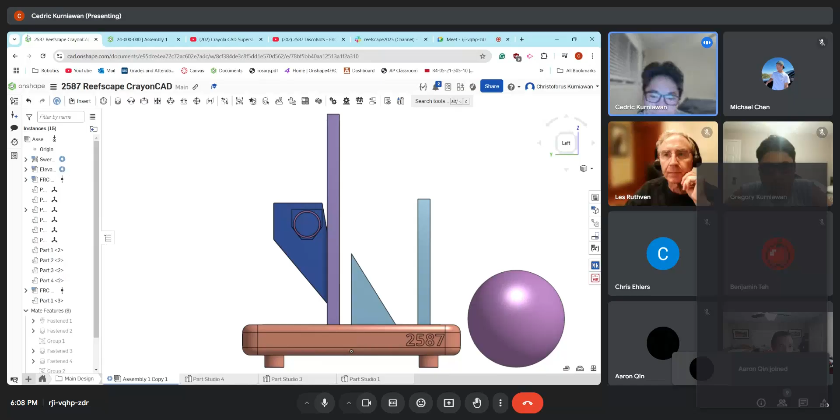So we already discussed this during kickoff, but obviously this year our main goal is to go simple. Our main goal this year is to make our robot as simple as possible. And we already discussed that we probably knew in order to get from L2 to an L3, we were probably going to need an elevator.

So this is that. And for the sake of simplicity, I thought doing a 2-stage elevator would be too much. So right now, it's just a standard 1-stage elevator with this mechanism on it. And so the whole idea with this robot is that we can...

Hold on one second, I'm looking at the screen. Do you guys have the CAD as your main screen? I can change myself. Yeah. Okay. Are you not seeing CAD? Okay, now I got it. Okay, sorry, I'll take a pause there.

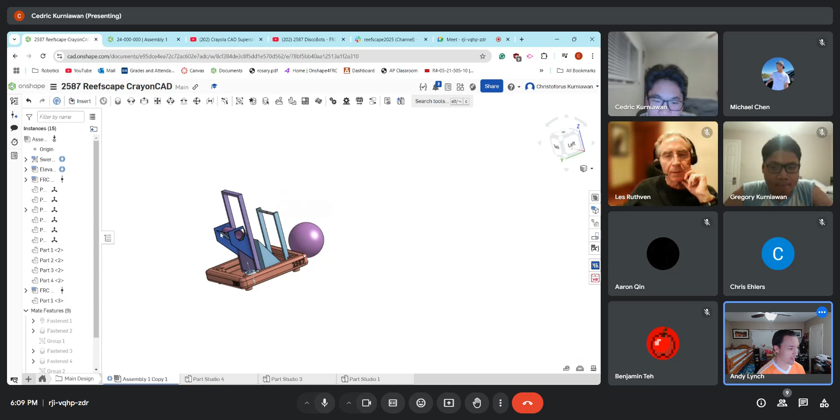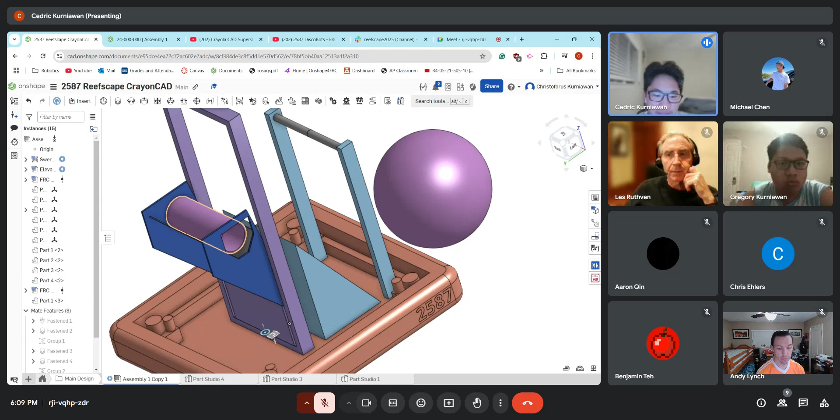Got it. So the whole idea here is we can intake it very easily through the human load station here, and without manipulating the coral in any way, we can outtake it and it's already in the correct orientation to score on the reef. So the elevator would be down and someone would roll the coral into here, and we would have some sort of flywheel mechanism, or we were also thinking vector mecanum wheels, to drive the coral out of this and onto the reef.

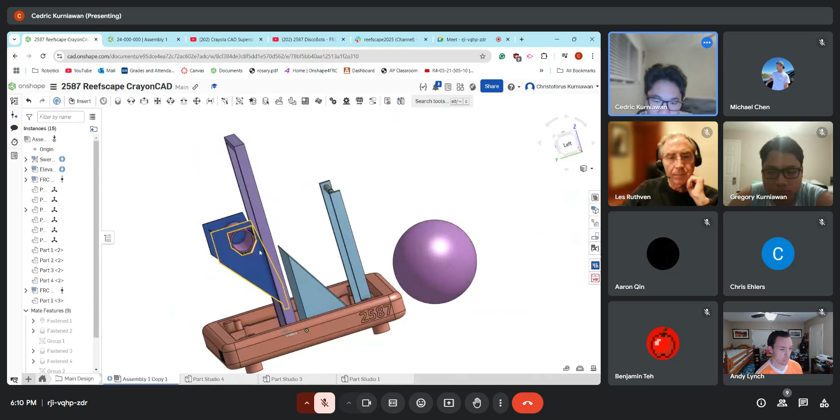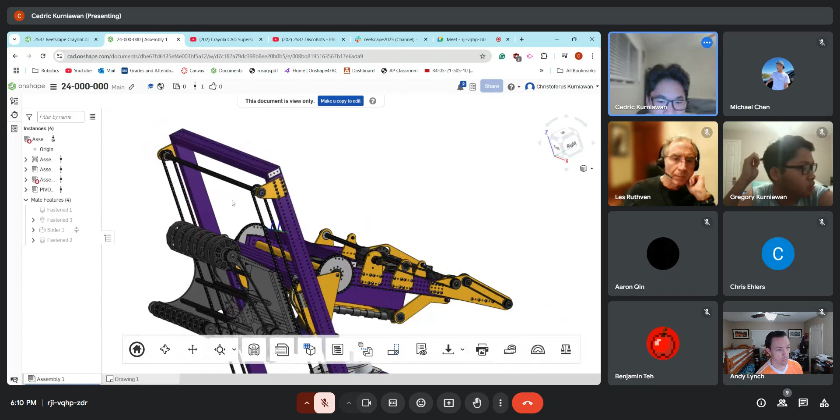You'll notice here, actually here, I'll talk about this section first. So this whole idea came from one of the Casino Clash CADathon entries, the one that won most innovative. I thought their elevator was extremely simple, and I feel like it's something we can do. So yes, this is a lot of stuff, I know, but their whole elevator is just this.

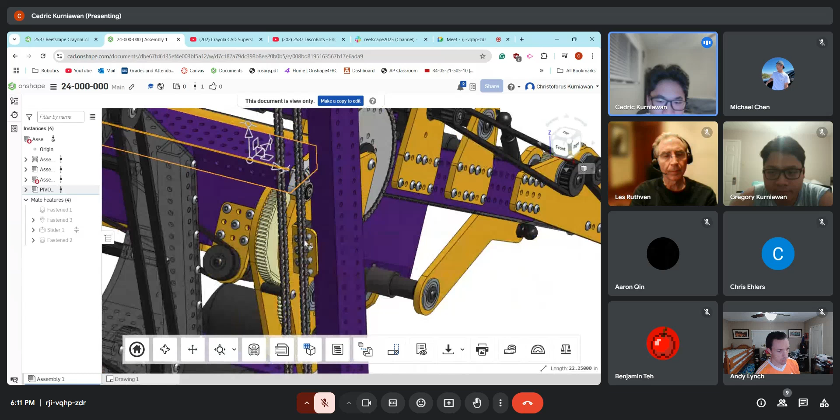If you look down here, it's just 2 motors connected to gears. You have sprockets on both sides, and then basically the same setup up at the top with the main carriage here, and you have these little brackets to mount the carriage to the chain. I know we said we wanted to stay away from elevators as much as we can, but as far as elevators go, this is probably one of the simplest versions we could do out there. So that's why we did that.

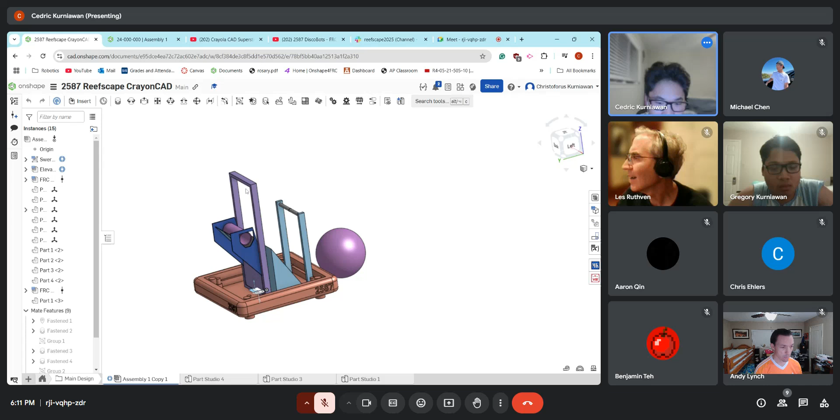We decided to say a very hard no to anything more than one stage, because when that happens, you start to mess around with tension, and that's just not something we want to do. So we thought this would be enough. Yes, there's a lot of interference right now, but we'll clean up the geometry in a sec.

When we finalize our approach, now for the algae mechanism, you may recognize this. This is from the 2014 robot for DiscoBots, Octanus. This is what we plan to do.

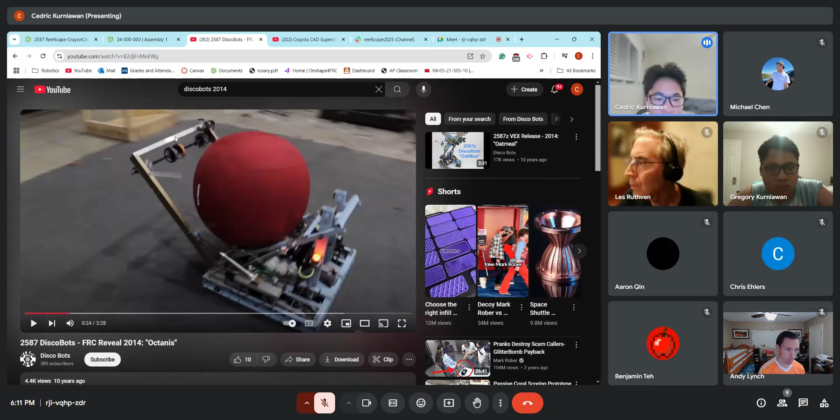A lot of our plans had a 4-bar involved, but we thought this was the simplest way to do this. How this would work is essentially this would pivot down and intake the algae ball, and then you'd get the ball into a position something like this. And when you get to the processor, you can just outtake it, and the ball should go straight into the processor. So we thought that was probably the easiest way to do that.

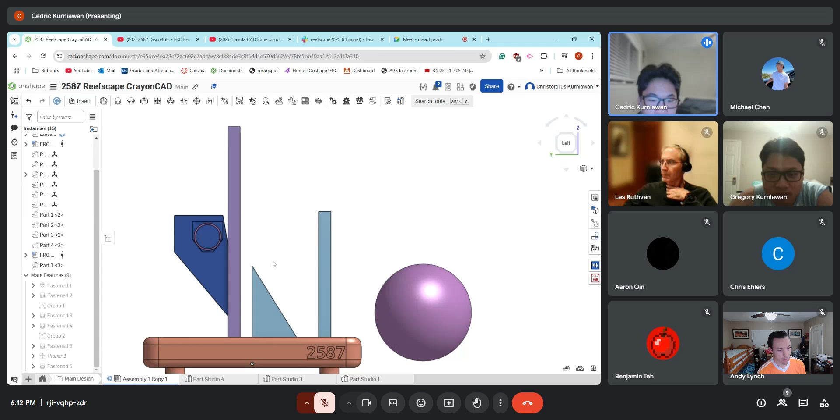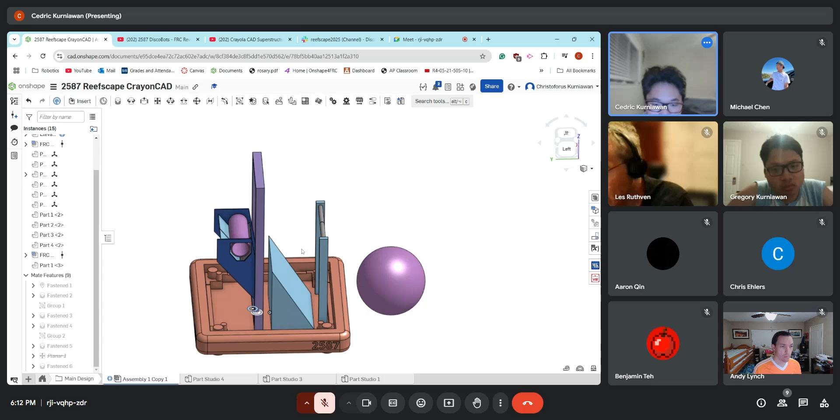In terms of climb, I know we discussed that it's not a priority, and it isn't. The only way I see us doing climb is if some other teams are prioritizing climb, so if any of them have a good system we can implement without making huge design sacrifices, that's feasible. Or when every bot gets released, they usually have a climber as well, so that's always an option.

One thing I would like to point out is that a lot of our ideas did align with a lot of the ideas that were from other teams. I saw Penn State had a very similar approach, doing L1, 2, and 3, and doing algae.

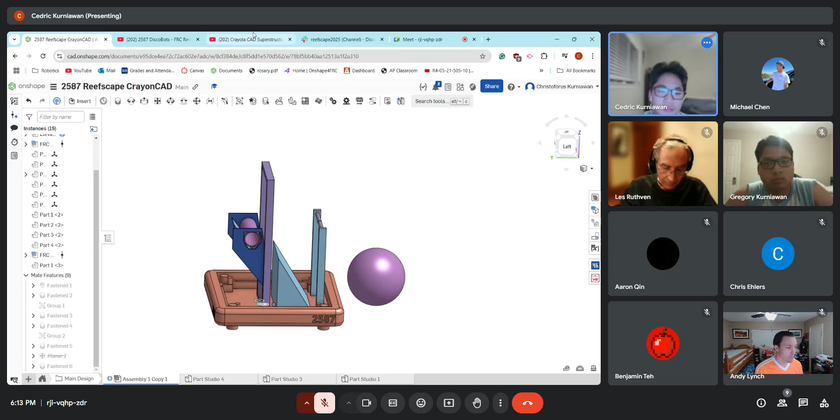This is Cranberry Alarm. They actually have quite the complex robot for their level. They have a 2-stage elevator, and you can see here we kind of have that same idea. Of course we're going to iterate upon our idea more, but this should be a good general idea of what we're trying to do, elevator-wise.

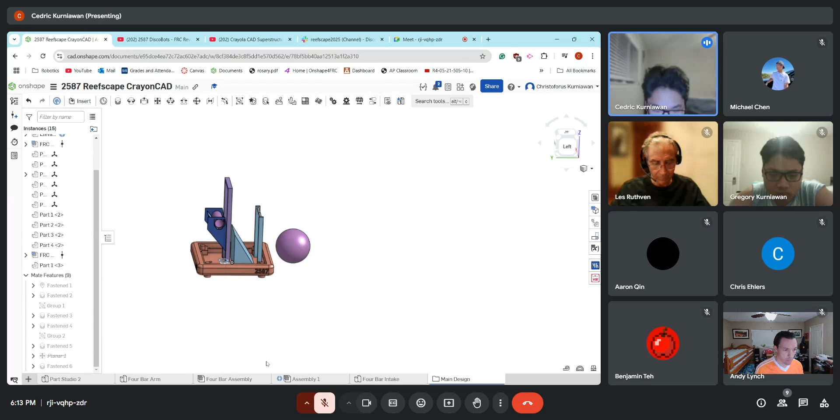Yeah, that's sort of what I've been working on. There was another one of our ideas. Before I got to this, I was thinking, how could we do this without an elevator? And that's when I stumbled upon trying to do a 4-bar, which looks something like this.

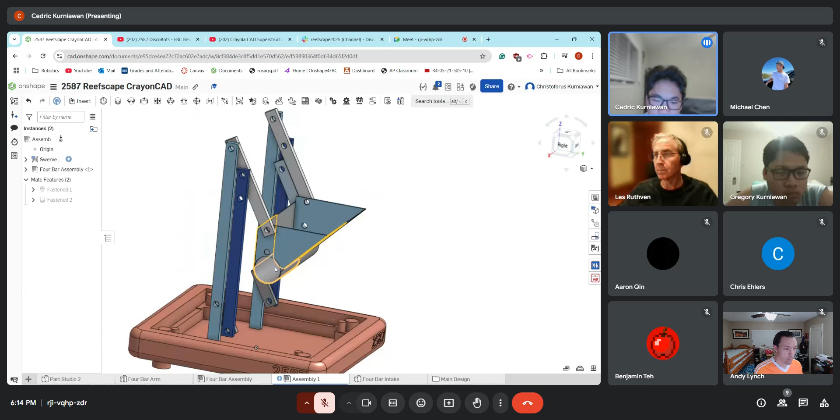This was the old version of the funnel, we can call it. It works in the same way, in essence, by the human load getting dropped into here, and then the coral getting seated here, and then you can outtake it through this hole onto the reef. After some looking at this, by the way, this inspiration was from Spectrum 2025. I saw one of their videos was a prototype 4-bar, which is where this whole idea came from.

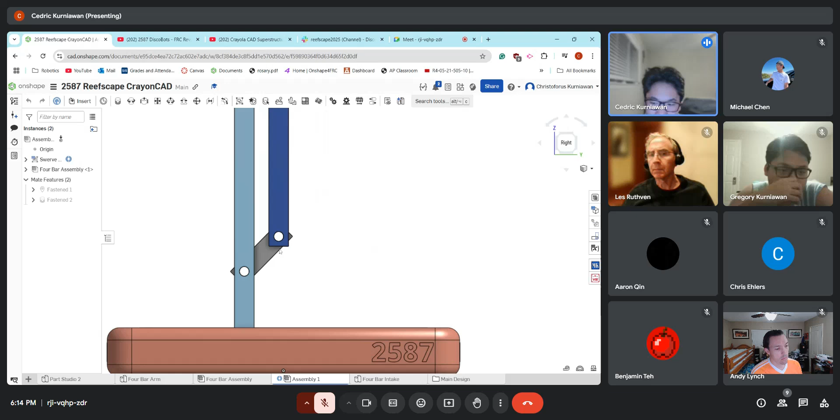Basically what they had was they used I think 2 motors, but only one thing was actually being driven, which is this piece of tube stock right here. And you can see via all the connections, you can get high and you can get pretty low as well.

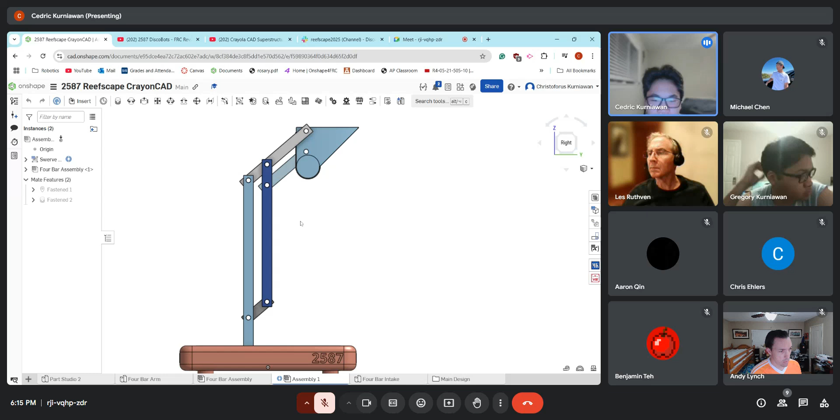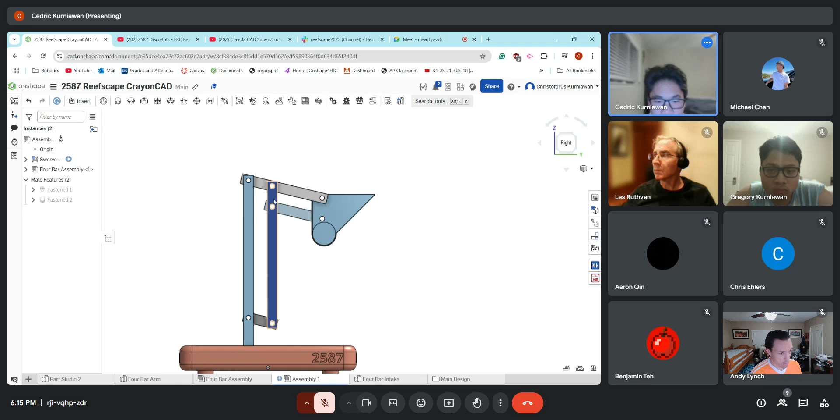So I thought this because before I figured out how to get the right elevator stuff, I was struggling to get the right reach to get to L3 using the elevator, so I thought this could have been the alternative. But once I looked at it again, I saw this is a lot of metal and it's really heavy. You could do a chain bar, which has the same functionality but works slightly differently. But I decided that this may not be the best option, and it may just be better to do an elevator sort of like this.

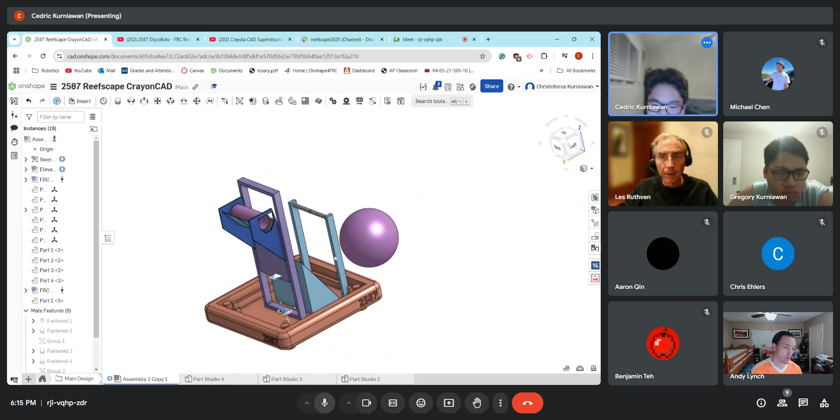Yeah, that's what I've been working on this past day, basically. I think it's a good start. I'm not so worried about the lifting mechanism.

I think if you've done the math, the top purple is max height. Top here from here to bottom is 41.75, which is extremely close. Again, that's definitely something I'm going to have to refine. But yeah, you'll see this is parallel distances, 41.75. The max height is 42, so we have a quarter-inch tolerance.

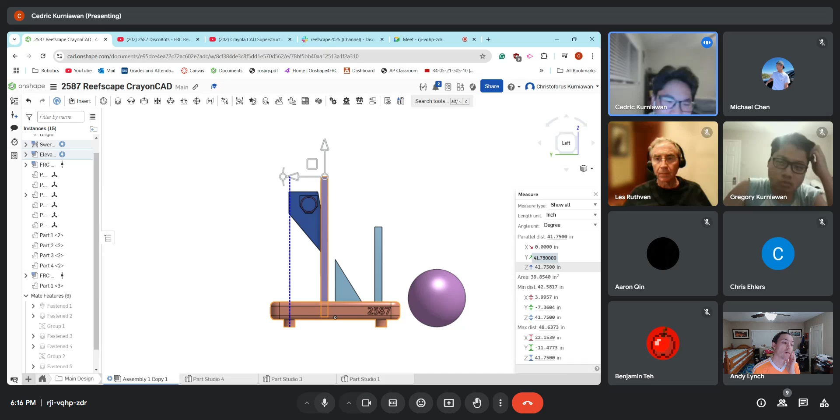But I promise this will get fixed. It's going to be a shorter elevator, and we're going to change the geometry of this blue plate here to make this work the same way, but be a little bit shorter.

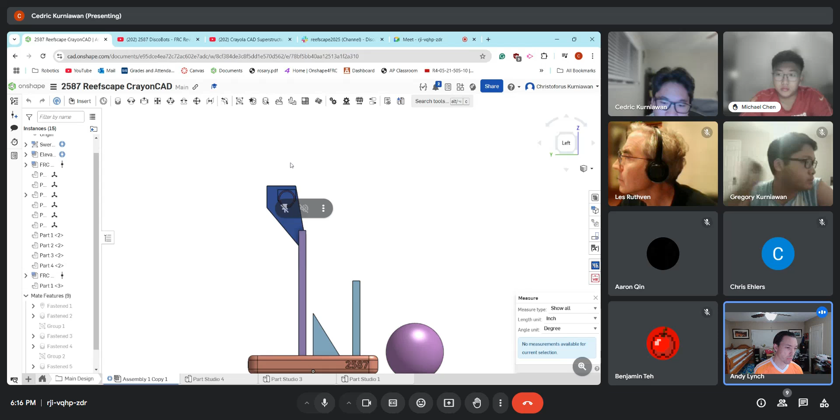And this goes to L3. Yeah, this is able to go to L3. What's the tolerance, like does it go above L3? Slightly above. I realized that for each of the reefs, the dimensions they give you, you could do like 1.5 to 2 inches above or below, and it should still get onto the reef. But right here, we are at absolute max reach. This number is 48.3, so we're right there.

Yeah, the tolerances aren't great right now, but that's because this is rushed. I think we could make it better if I spent more time trying to refine all of this.

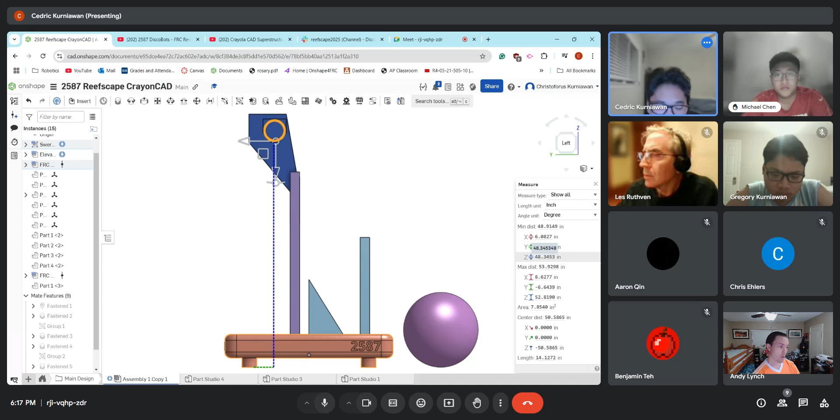Oh, I have a question. So for the algae mechanism, does it gonna squeeze the ball over it, or does it just kind of extend it and grab it?

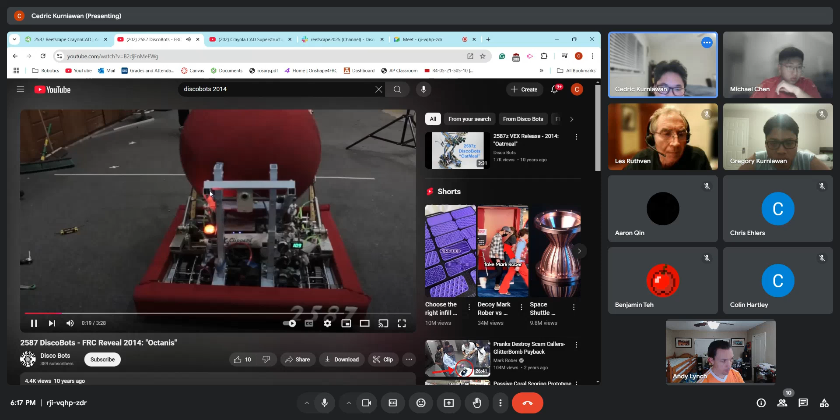It's gonna work like this. This is 2014, and it'll work in a way where the arm just kind of pivots down, and it intakes the ball and seats it right there. Oh, okay, that's why I have the little triangle thing here.

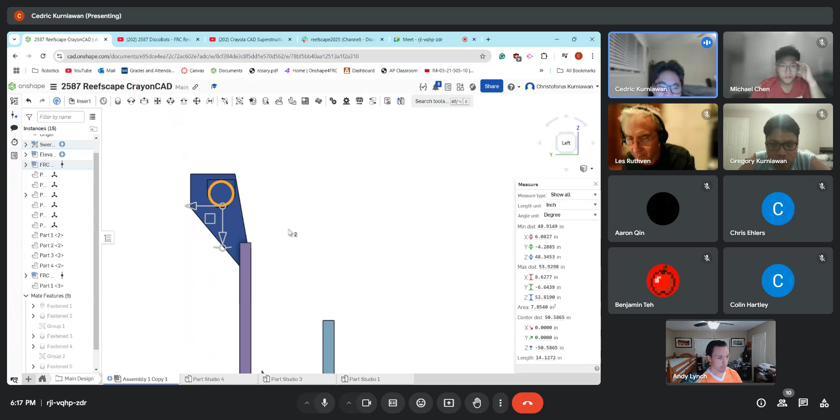That was the idea behind that. Okay, gotcha. And then also, based on Cranberry Alarm's demos, we saw that it's actually not insanely difficult to de-algify the reef. What they had was just an axle with compliant wheels, and as long as you hit the bottom of the algae balls, they came off pretty easily.

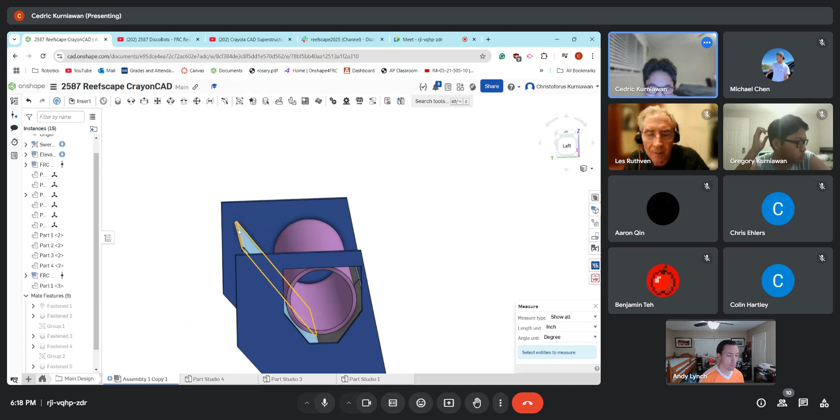So my idea, this is a pretty late addition so I didn't really get to CAD it all, but my idea was to have a set of roller shafts basically right in this region that's on the intake, I guess you could say. And it should just push the algae balls out where this mechanism can control it and score it in the processor.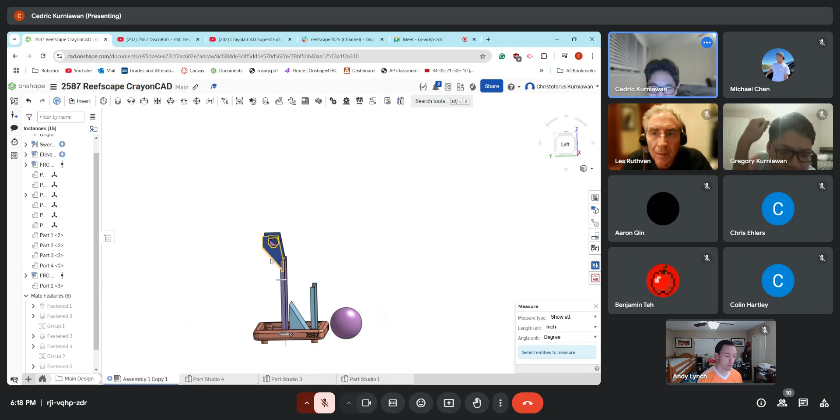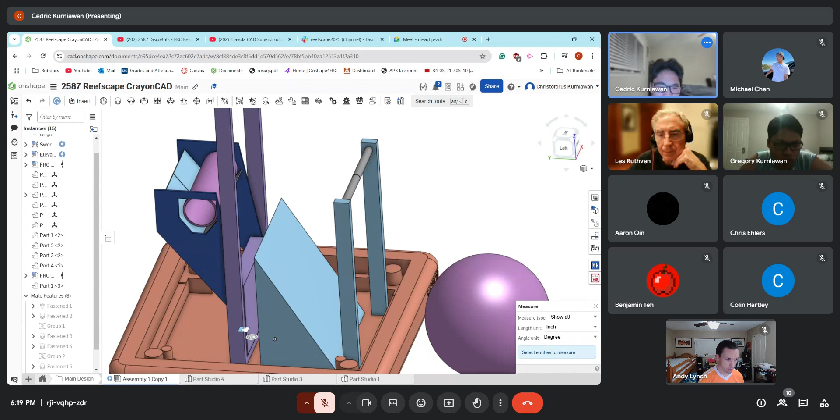Oh, this is also a 29 by 29 drivetrain, because I figured out that there really isn't any choke points this year, especially compared to years past. So having a bigger drivetrain isn't really a bad thing. If anything, it may be a good thing, because I suspect a lot of the robots this year are going to be pretty tall, so having a larger drivetrain would also help with stability and weight.

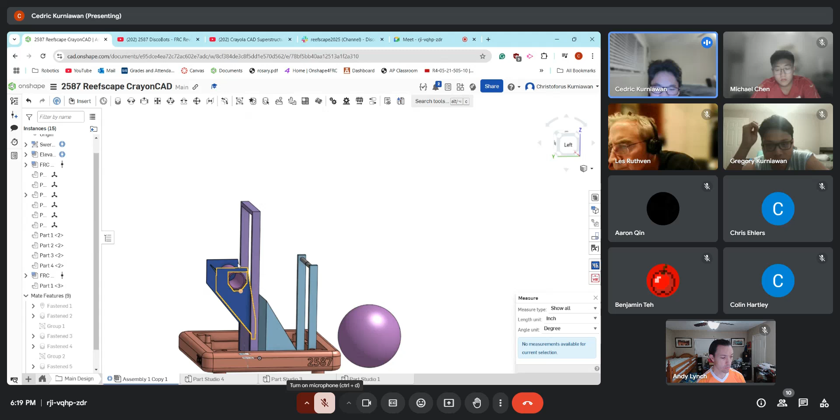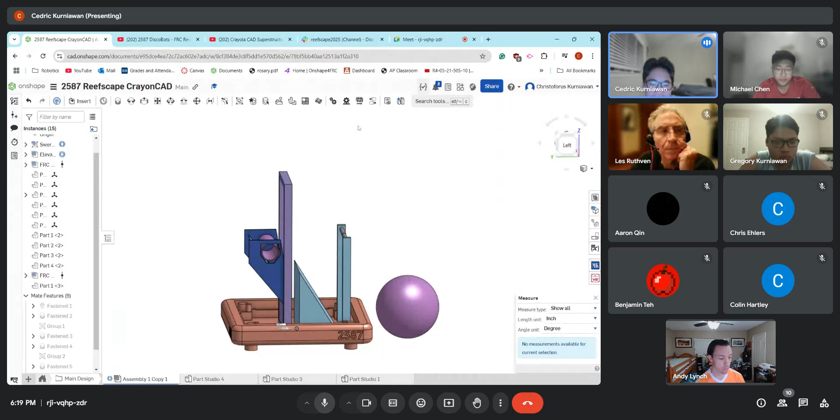So, yeah, that was my 2 cents on it. Tried to max it out without getting too close. So a 29 would be 29 times 4, which is 116. The max is 120. So, yeah, but if we cut, 29 is a pretty solid number, so hopefully we don't have any issues cutting 29-inch tube stock. So we should be fine in that regard.

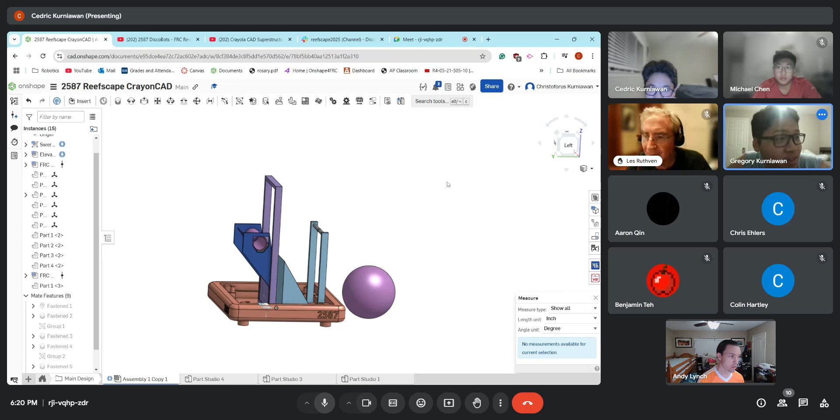Go ahead, Les. Surely, smaller, right? The corners are going to be... Yeah. Go ahead, Les. Yeah, it is nice. Oh, Les, you're muted, by the way, Les. Okay, better now. Okay, yes.

So the question I had was the ball intake. I noticed on Cranberry Alliance, they have like 13-inch 1x2s, and they have compliant wheels on top and bottom. And they actually don't put it inside the robot, they just go out there and hold onto it. In a way, having the robot clear might be good, and not having a ball stuck in the robot too. So it might actually help, make everything a little bit thinner too.

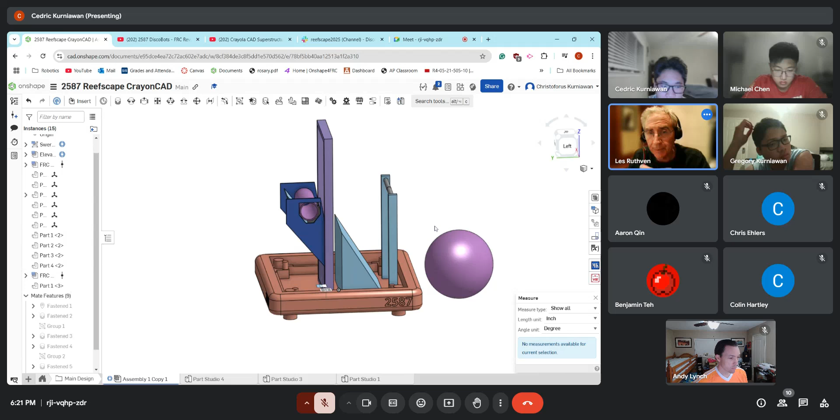If you could just still lean it forward, basically you could spin them opposite direction to pull the ball in, and they were saying when you go out, you could spin it kind of the same way. It's kind of like a conveyor belt, and it goes in off of that. I don't know if you saw that, but so yeah. I mean, it would allow you to have this part in the middle clear.

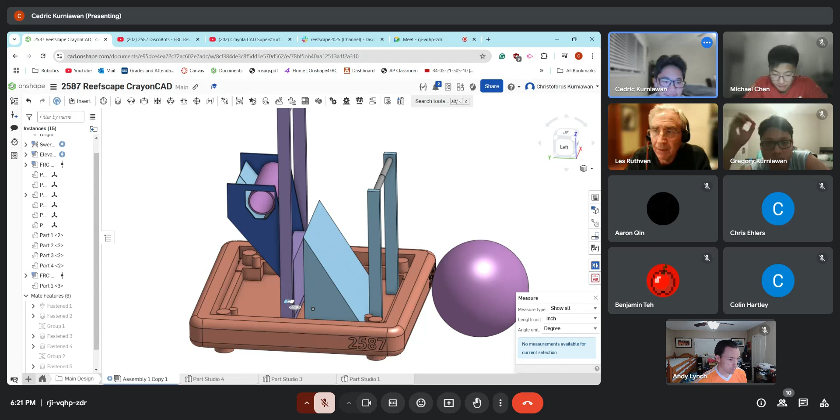The other thing, we've got a lift, we could probably lift ourselves. I don't know how heavy the robot is, but if we geared it pretty decently. Yeah, I mean, my idea for the lift was to make it just so strong that even if we, at the end of the day, decide to implement a lift mechanism, we shouldn't have to worry about is it strong enough. I want to make sure that when we build this lift, it's going to be strong enough for that. Yeah, that was my thought.

Yeah, the other thing is, ThriftyBot lift is not a bad lift to do. They have a single stage, and it's all out of the box or whatever. It's pretty reasonable, so I don't know. Yeah, I was also considering that. I remember looking at that a while ago. If we get it, it's an option.

Yeah, it looks like, knock on wood, it doesn't say it's out of stock yet. So if we don't worry about stock, don't worry about that. Options, and then whatever we can actually order, then you can go deeper into, okay, we can use this as our part. Yeah.

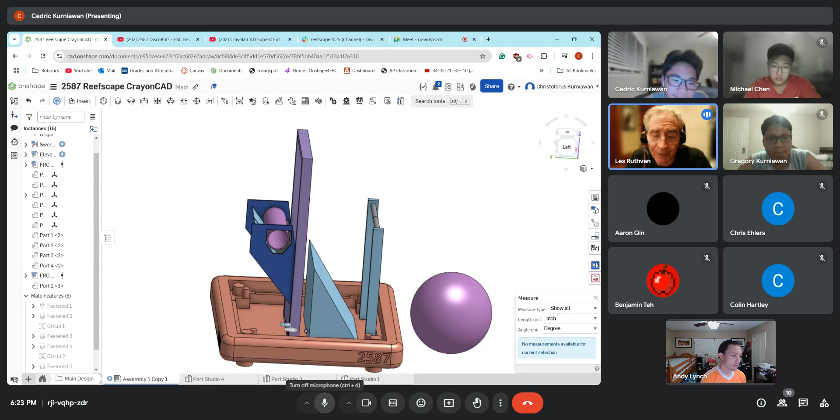Was that a challenge? Oh, that was the hatch panels, I think. Our lift was a little heavy, like taking the balls in was a little bit heavy, so I don't think it was all that successful. But it worked okay. We did it, but it's not that different from the design you just showed.

Right, I mean, first chain all the way up. It's not that bad, as long as you don't do multi-stage lifts, which we've not really done that much. It should be fine. It's doable, especially now motors are getting so much stronger.

Yeah, I guess we did it with Falcons, maybe 2 Falcons. I think we just used CIMs or something. It was 2019, so. But anyway, I think our issue was we had a ball and a hatch mechanism, which made it too heavy. So this is not bad. The other thing on your mechanism, I see you have it sideways.

Cranberry Alarm has one that's more like compliant wheels, it just wheels in, but it requires the human loader to use those rails to go straight. So you have to, then they have some kind of a funnel type thing. Their design also requires you to outtake the coral, half of it out of the robot before you can move the lift, and I thought that was not very good, so I decided to stray away from that.

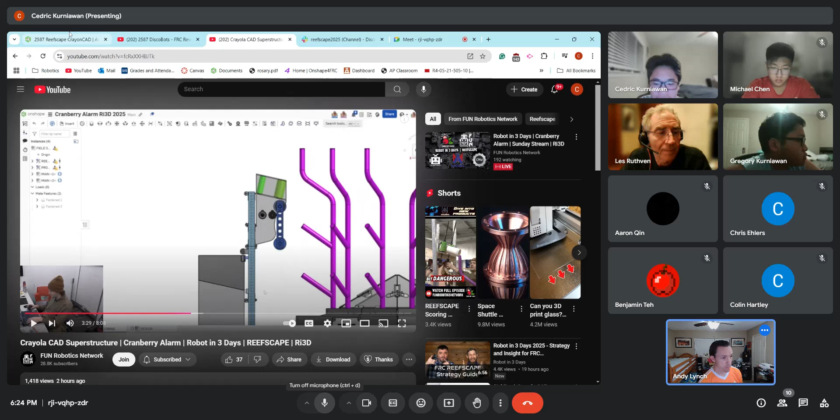Yeah, it's pretty simple, I like the simplicity. I don't think we need to aim for L4. I think climber, we can keep some flexibility on things, but it doesn't have to be integrated to this. I almost like just making really efficient systems that'll do what they need to do, and then if we have time for a climber, we can look at it.

But after reading a lot of strategy things, people that speak about climbers, they all talk about deep climb. I saw a lot of the Ri3D teams, like Cranberry Alarm, Penn State - a lot of them just went straight to, we need to do the deep climb, which I don't know why they did that. I think it's a function of them assuming their partners will not be able to climb.

That's our experience too, at small district events there's a pretty high likelihood that even if your partner can climb, it might not work all the time. So you're really hoping that you are the climb and the other person's just a park. Given the park capability and number of people we have this year, I just don't know if that's in our cards. I think we need to focus.

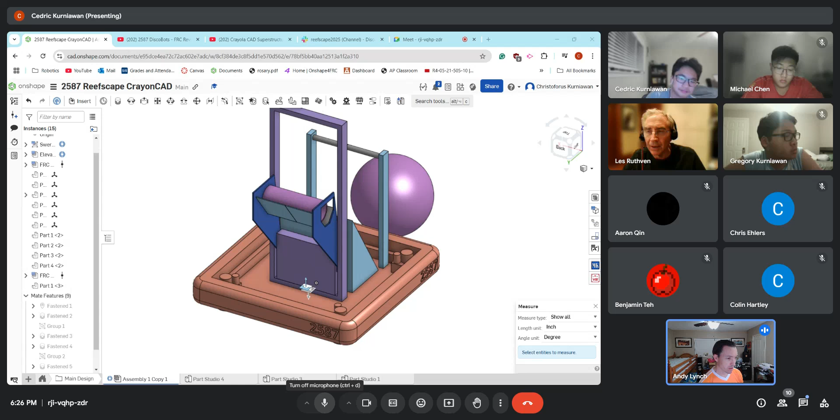But actually, if you have this lift here and you keep the middle open, it allows us some more options, because basically we could just somehow grab on and go straight down versus just have a donut hole in the middle and kind of lift up. That's an interesting idea - we could have a version that's a really simple output, and then a more complicated one that has space for the cage to go in.

So if you don't have the blue thing in there, you could have a donut hole in the bottom. So basically, you could have two versions of your intake mechanism: one that's more fancy that allows the cage to go in, and it probably will take a lot more design to make sure it fits and locks into the lift. And then the other one is just - you won't be able to get the cage in there.

So I mean, we could obviously build the first one as a prototype, and then eventually have a version 2 that, if we make the lift strong enough, brings in the whole cage, and then we just go up. Even if it's a shallow climb, I think we could go up pretty easily - it's like 8 inches for the cage, so 8 by 8.

The deep climb is more tricky because then you're really having to deal with like CG, and would we actually go up a lot but not be touching the ground - hang or not. That's such a hard challenge. We could definitely make this type of design, probably do the shallow, which would be interesting. And to your point earlier about footprint size, the size of the drive base - if you maximize that, it's going to give you more room on the inside to have that 8 by 8 square fit inside.

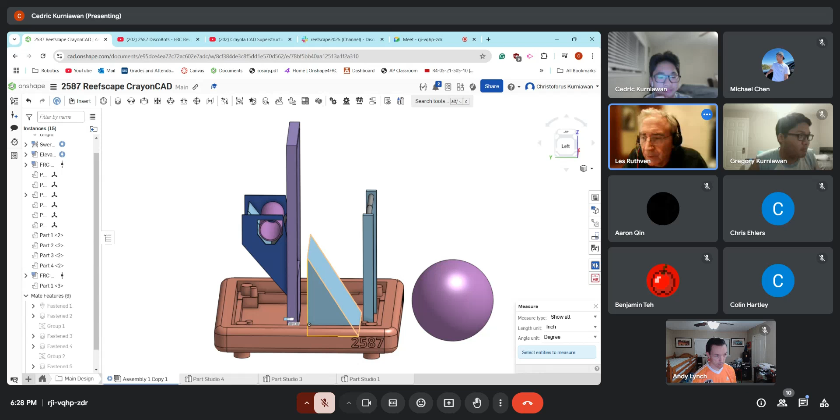You do kind of have weight on the back and weight on the front. So even if you were to put the algae thing down in the back to kind of help balance things. Yeah, so that's true, keep it more in the center. I'll think about that.

That's a cool idea. The 2014 robot you referred to, Octanus, used pneumatics to lift or lower that arm. You can see the cylinders.

My vote would be to avoid pneumatics. Yeah, no, I agree. That's not really something I personally have ever dealt with, and I want it to stay that way for this year. I would advocate for just using something like a Neo probably, and either do a chain and sprocket, or we can try to do a rack and pinion sort of thing, or just have 2 gears and have it pivot. It's something I have to look at, but yeah, definitely no pneumatics. I want to stay away from that.

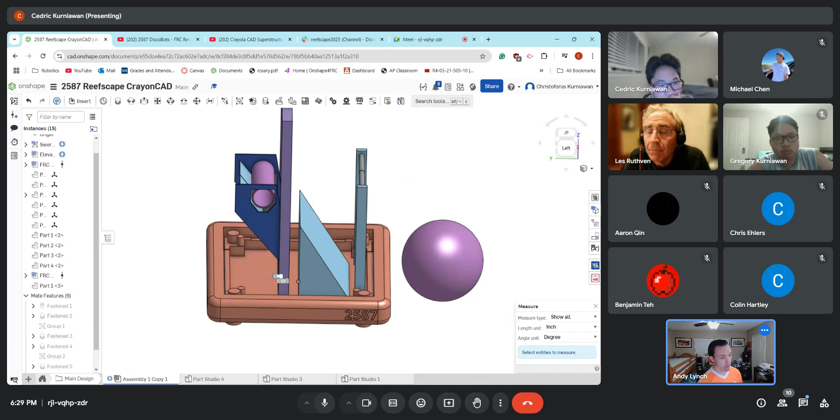There's also just swap-in options, so get that option. Yeah, it's not that heavy, so you could just deploy and come back. So an upright and a leaning, it's not bad.

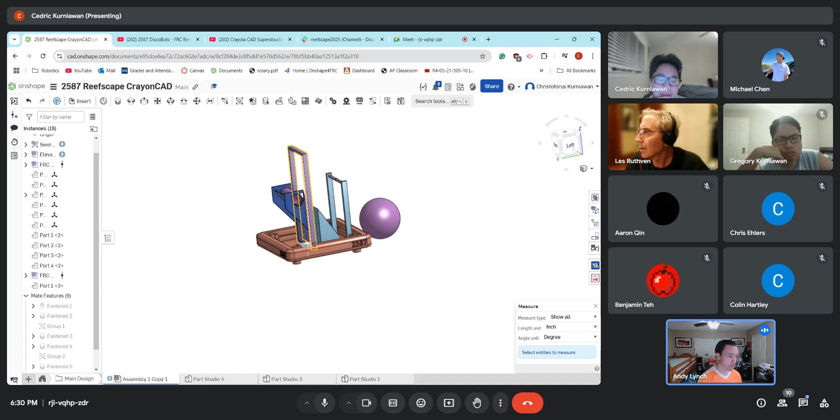But other than that, I think this is pretty good start. I'll think with this general direction. I don't have any issues with it. I'm not sure on dimensions. So just make sure you have enough tolerance, because if a single stage lift can't get up there, then it's a little concerning for L3. Yeah, definitely, we need to think carefully about what we're doing.

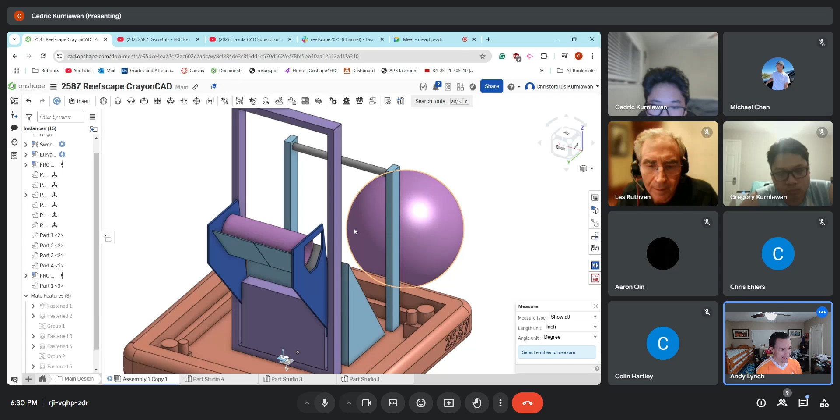Anybody else have some thoughts or questions? I know we got a lot of new people here, maybe they haven't gone through this before. It's okay to ask questions about what this is, how this is going to work, because this is a very basic CAD.

I just wanted to throw out one general comment. Cedric, you mentioned you were concerned about the 4-bar you were talking about earlier from Spectrum, and you're concerned about the weight of the mechanism. Obviously, you can change that design. You don't necessarily have to make it out of tube, you can make it out of Lexan sheet, just flat bar linkages. So don't immediately rule that out. Just keep that in your back pocket if you want to investigate an alternative design as opposed to the elevator.

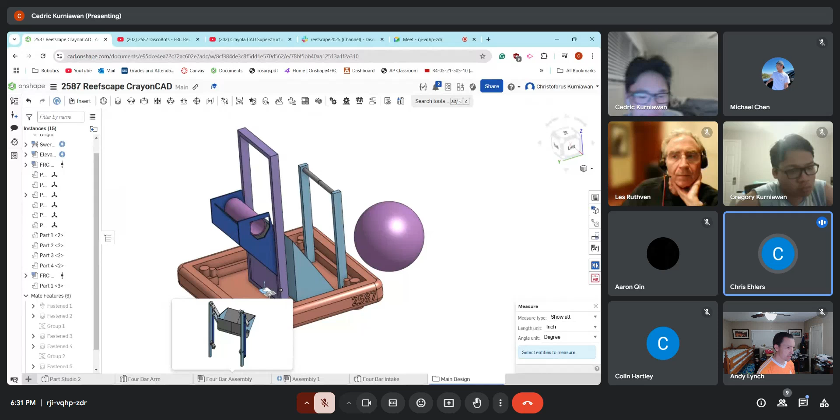Yeah, that's a good point. In the past, we would always take a 4-bar over a lift, an elevator, yeah. And that is still true for like Vex. It's just so much simpler to build one quickly, so that just generally holds for robotics. So I wouldn't totally ignore it, it's worth looking at the path on it.

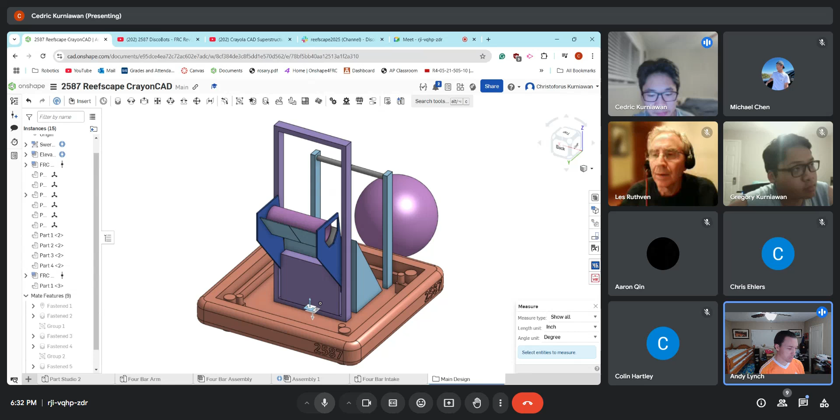But one issue I see with it is we're not going very low, and typically a 4-bar is picking up something from the ground, nice and flat off the ground, keeping it completely parallel to the ground as it goes up. That's where it's a huge advantage, to take an object off the ground and lift it up pretty high. In this case, we have a little bit of flexibility, and we're not even going that low, so it's not even like we've drawn a very long 4-bar. So I don't know how much height we're really gonna get out of it.

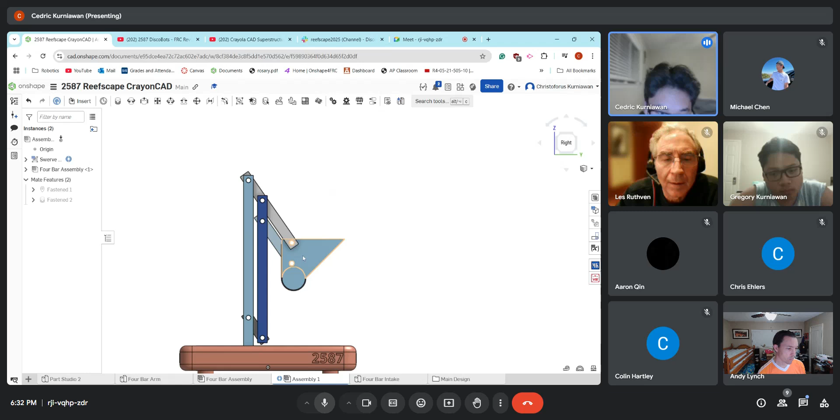It's true, is this one? This like barely gets to L3. It's about the same as the elevator. Greg pointed out a good reason earlier.

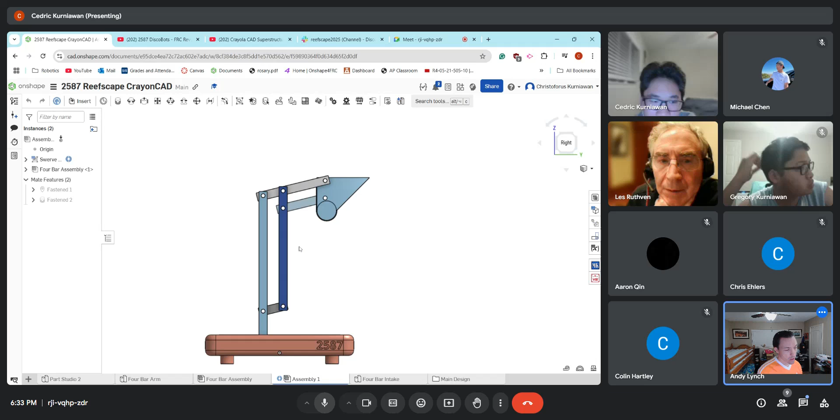If you want to switch from L2 to L3, you'd have to change the distance, you need to drive away from it as this gets into the center. Because as you trace, like the middle of the circle, it basically draws an arc, and it's not a straight line, which would make it harder to score in theory. Yeah, it almost seems like the way you build this, you need to make the outtake be almost a little offset from the center, because you want it to go like almost to the very edge of your frame perimeter when it outtakes, so it's as close as possible. Yeah, so it's going to look a little funny when it actually is built.

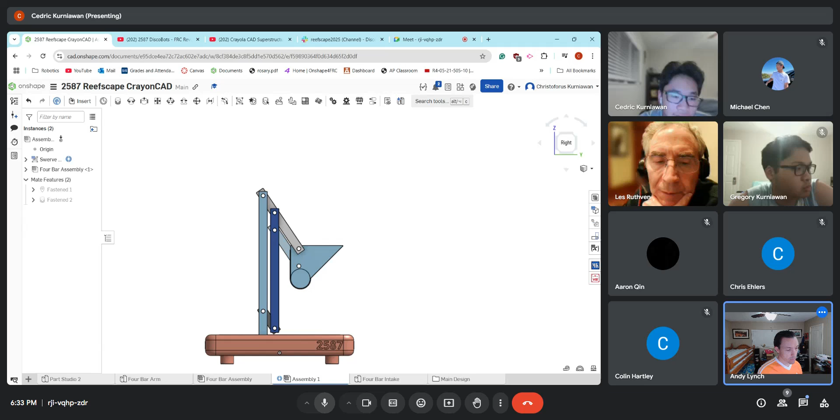I'm not sure. To that effect, you're obviously not going to have room for your algae intake mechanism, because that's a packaging issue there. Yeah, definitely.

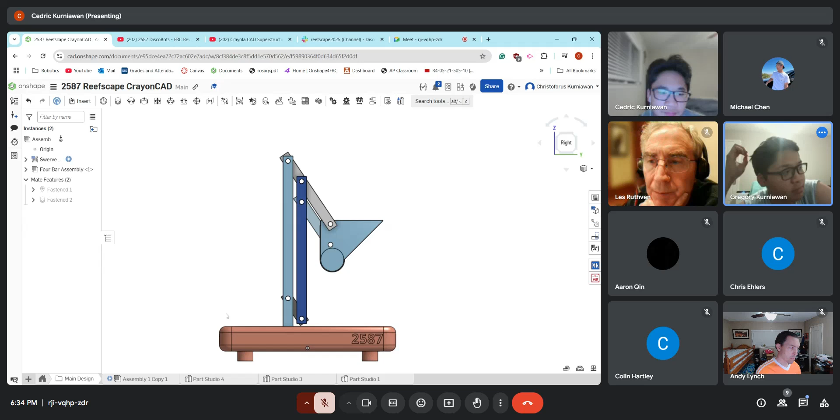I'm not sure how easily the PVC will sit inside the funnel, and how consistent we can get it to the right orientation. We should probably need to look into it and test that a bit more before we settle on a design for the funnel. I know Cranberry Alarm showed some designs for something like that, but I also know pipes trying to get into orientations get really stuck easily on funnels like this.

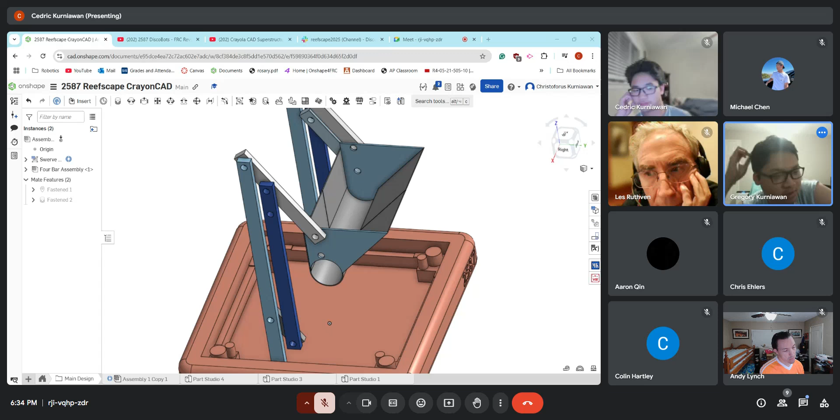So I don't know if we can do it fully passively for the funnel, or if we need wheels to push it in a certain direction, like push it down or something.

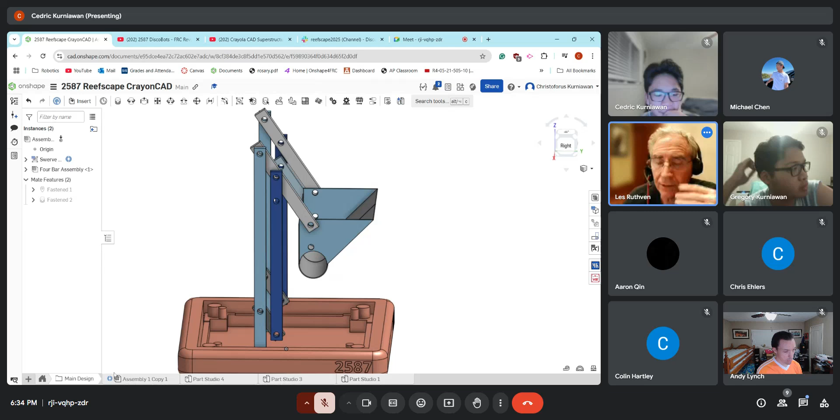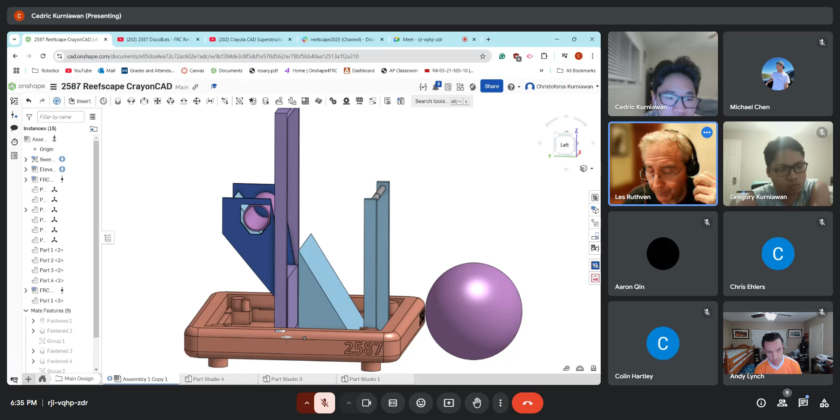So the other thing about the wheels, you were saying, Cedric, is that to get the algae off you'd use compliant wheels spinning in contact with the algae, and it would either spin it up or spin it down. If you did an active coral, you could spin it to get the algae off too.

Yeah, it's definitely an option. So if you have it active, you could use both, possibly.

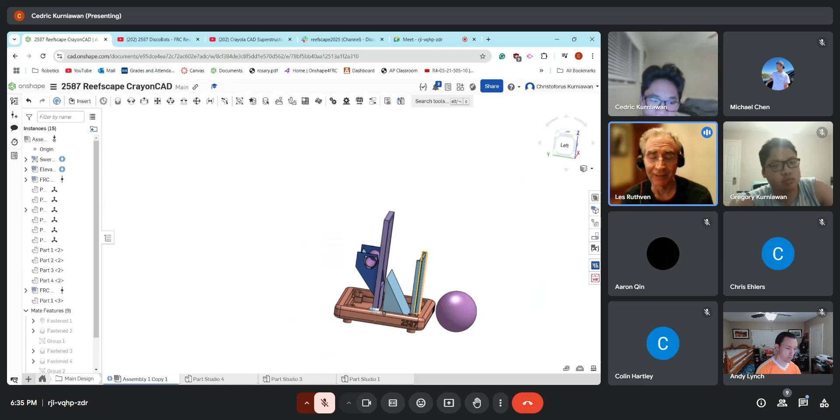Obviously it'd be heavier, but the good news is the element's not that heavy. The coral's not that heavy.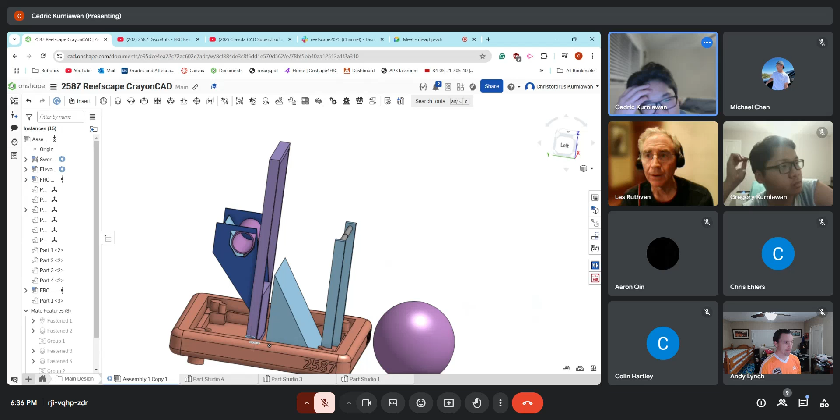And I think what Chris says about maybe not using aluminum is we could do something that's a little bit lighter. We don't have to use box tube for a lot of this. We could do aluminum plate or something.

Well, it doesn't sound like we have a lot of dissent, which is unusual for our group. That's really concerning though, the fact that no one is saying no to this idea.

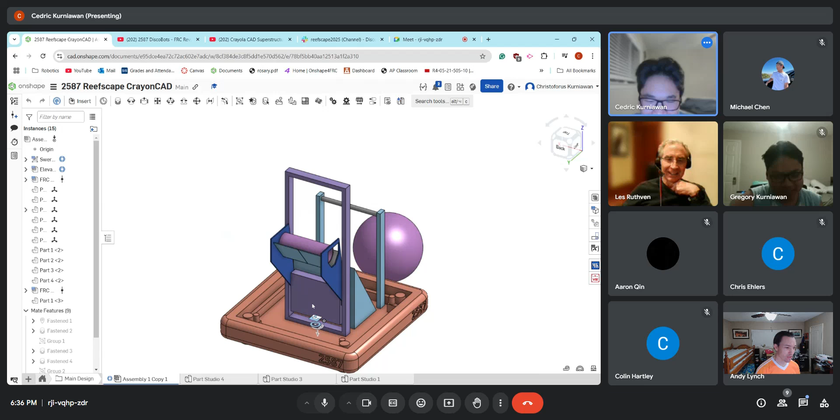In the past we have a lot of priorities, a lot of things we want to do, and we're usually trying to do an L4 sort of design. If you do that, it adds a bunch of different variables and complexity, and that's why we generally have less agreement, because some designs are very complex and take more time. In this case we're not aiming for the very max, so it's not as complicated, and everyone can generally agree this should work if we get into the details.

So I don't have any major issues here. I think we're keeping it simple, something we can build with our resources and time, which is something we made some mistakes on last year. So I think we need to really simplify and try to build faster and be sure it works.

For the intake of the algae prototype, we could probably do that with some Max pattern stuff. I saw Cranberry Alarm has just two extremely long tubes of Max pattern, and then they have wheels going across it with varying compressions, so they can test quickly without swapping anything. We do have some at Lamar.

I think we have like a 25-inch whatever. We could do that, and you could even do the pivot with that Max. What's that thing called? Spline, Max Spline. Yeah, right.

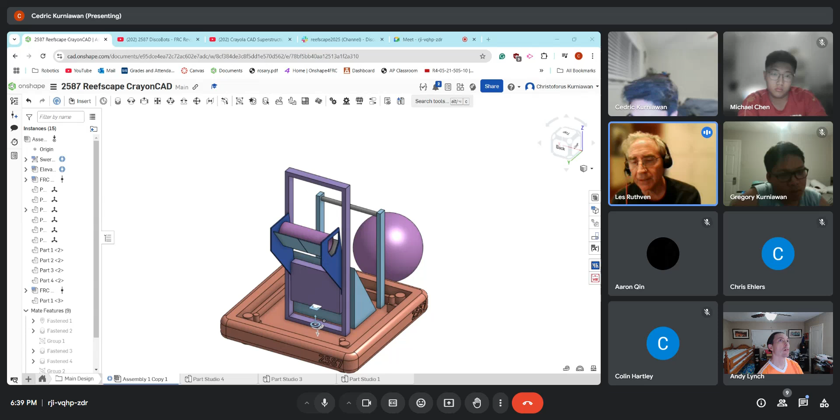We would have to either knock the algae off, or if it's the right height, we could capture the algae. Maybe if it's upright we could capture it and put it in. So if it's on that, we might be able to keep it inside the perimeter and have wheels on top and bottom just suck it in.

That's my comment — for some reason I thought there's a world where you can start with the algae. No worries. And we are going to have to figure out how to get rid of the algae on the reef, because we can't score level 2 unless we get rid of something.

I think that's something we can easily play with in CAD. Just appendages that stick up as the lift goes up to knock the ball up. You can even make it something that drops down and then just knocks it up. Yeah, and the lift is going to go up and down, so we've got motion.

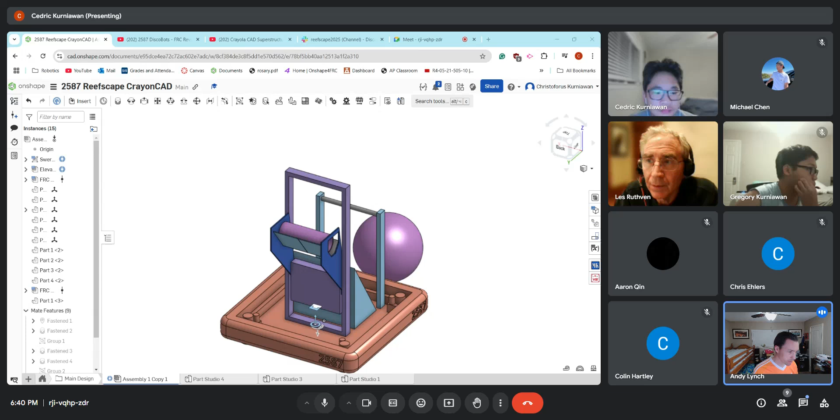I think you could actually split up the sides. So like, let's say you have your coral deposit side, and then on the other side of the lift you could have weird appendages that come out specifically designed to quickly knock the algae out. Oh okay, so you would hit it from whatever side you're trying to do the action, so that way it's very quick. I would do that, but I remember they also...

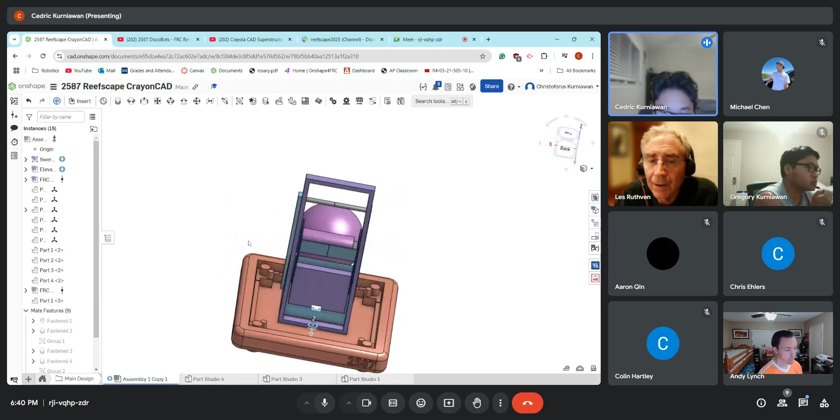Cranberry Alarm also made a video on de-algifying, and they showed that if you hit it from the side of the algae, it actually makes it fit more snugly. They said the best way to do it was to either hit below or above. You're supposed to contact the algae ball below to pop it out of the reef spot, because if you hit it from the side, from what they saw, you were just hitting the ball up, which made it more wedged in between and harder to remove eventually.

Unfortunately, this is one of those things we don't have a great testing apparatus for. We don't have a full reef to quickly check all this out, so we can do some math in CAD and probably start looking at what people are prototyping, and base it off of those sketches, because it's going to be difficult to do.

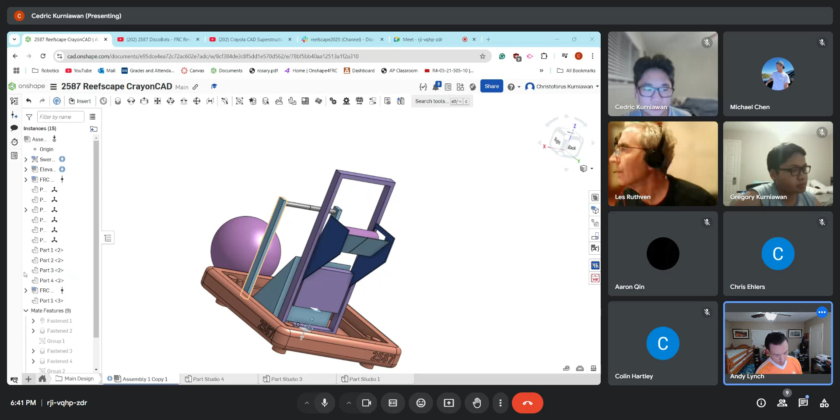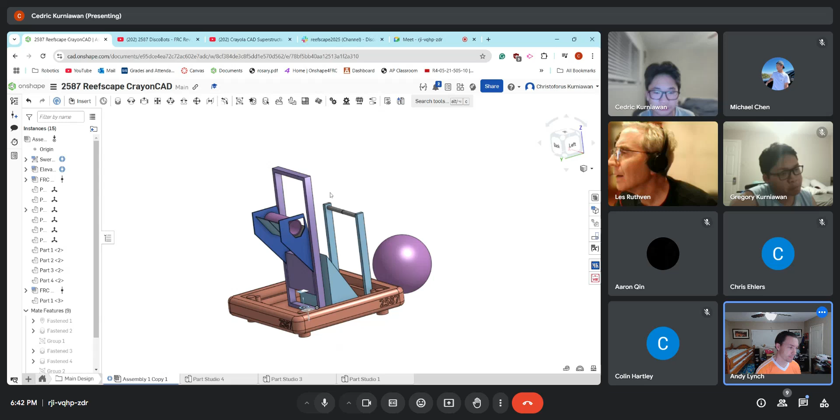I'm okay with this direction, Cedric. The big decision is to go deeper into OnShape. I think you go deep into the drivetrain OnShape pretty fast, and start thinking about how you're going to do the main lift attachment to the drivetrain, and think about how stable it's all going to be. Then once everyone's happy with that, you can really start working into the details of how to actually make the motors work, what mechanism.

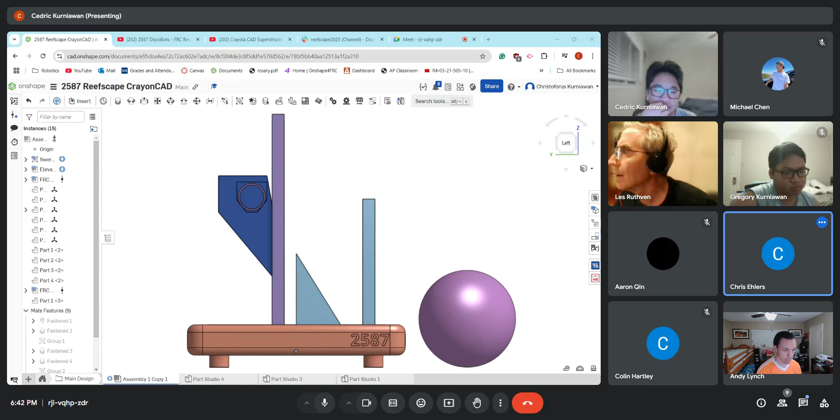I was going to mention, you might want to also consider your bumper height too, as far as picking up the algae — do you want the bumper height high or low, that type of one extreme versus the other? Yeah, and for algae we would want it to be low. I think it would be the easier way to do it low, but obviously it'd be easier to pick it up if it's low, but then if you're trying to go to the processing station and the processing station is 7 inches up, you don't want to have to fight to get it up into it.

So maybe we'll have a look at it. Yeah, yeah.

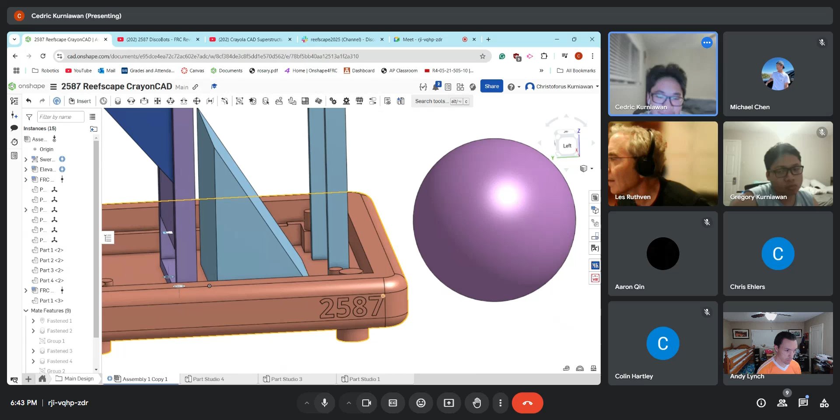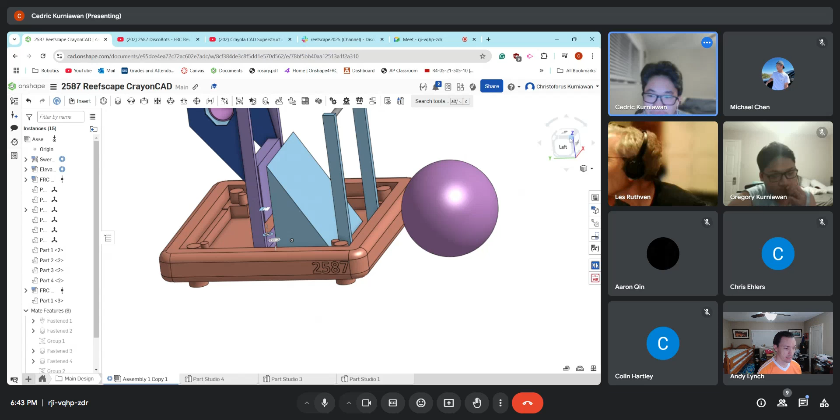Concerns. I guess while we're at it with bumpers, they made a lot of rule changes, but should we just keep doing bumpers the way we do them? Just wood and then foam. Like they made it so you could have more padding and more materials, but can we just do it the way we normally do it?

I think it would be the easiest way. And then we need to make a little improvement over last year's bumpers — they were definitely not that great. We've had much better bumpers in the past, so we need to just look carefully at the attachment and make sure it's well thought out. We just didn't do a good job of CADing that last year.

Attachment — I'm thinking I want to do the latches I did for Catathon. I want to see if we need to order those to see if they actually work or not, but they should. We have a number of different latch attachments.

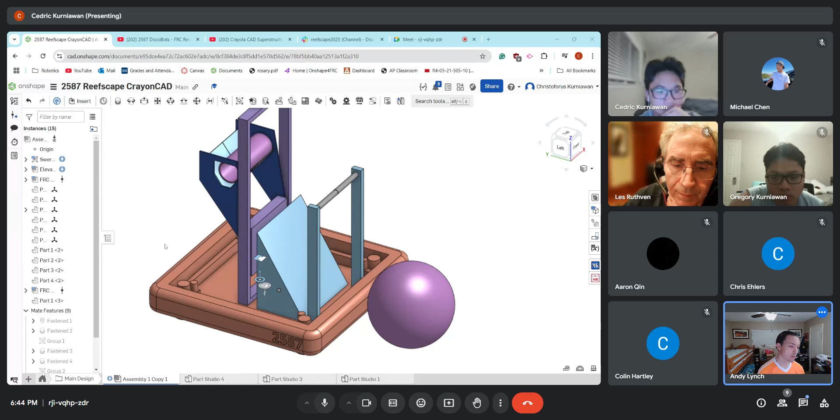But for just prototyping, I would say go ahead and assume it's going to be a 5-inch tall bumper using 2 pool noodles, unless some other teams indicate there might be an advantage to using a different construction type. But obviously, if we're going to try to keep it simple, then keep it to what we're familiar with, which is the pool noodles. Yeah, definitely.